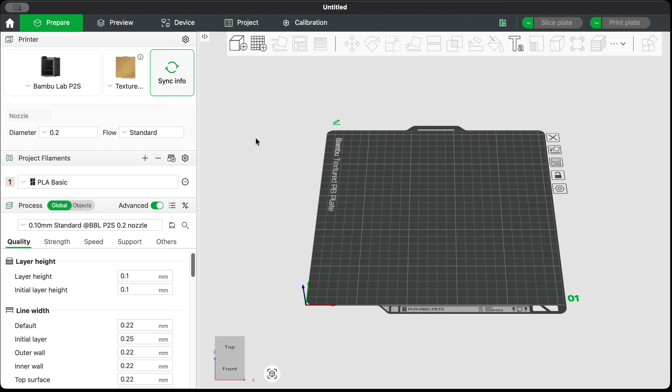It's actually much simpler than it might seem at first, so just follow along and you'll get the hang of it quickly. To start, open up Bambu Studio. Once you're in, import the model you want to work with and make sure it's ready to go. For this example, I'm using a small character model.

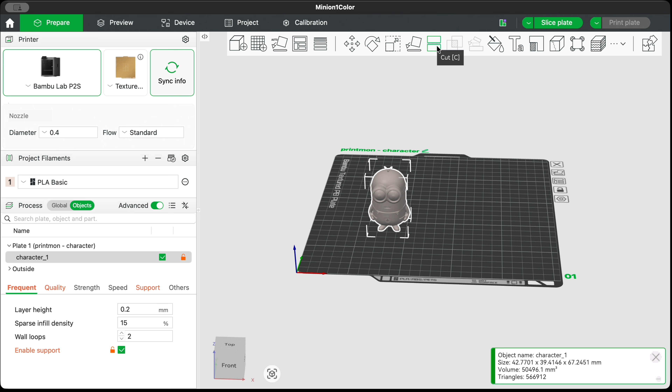Next, select your model so it's highlighted. After that, head up to the top menu and find the Cut tool. It looks like two blocks with a divided line between them. Click on that to begin.

At this point, you'll see a preview of where your software suggests making the cut. Don't worry if it's not where you want it. That's totally normal. You can adjust it easily.

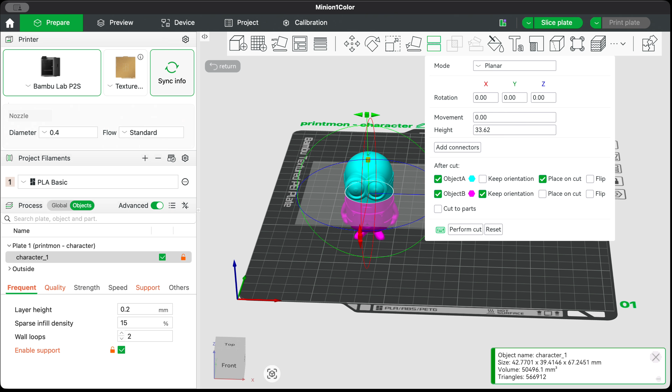Use the coloured axis handle to move the cut line around your model. Just click and drag along the axis to reposition it. For example, if your cut is going through an area you don't want, like part of the arm or face, you can slide it up or down until it's in a better spot.

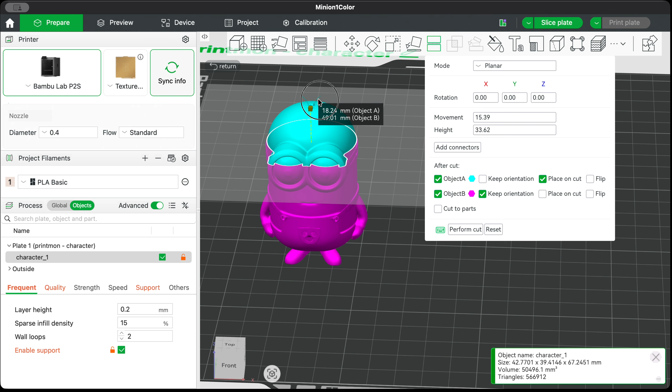You can also rotate or angle the cut if needed, giving you full control over how the model is divided. Once you're happy with the cut position, it's a good idea to add connectors so the pieces can be reassembled later.

Look for the option to add connectors, then choose a style. There are several options available like plugs, snaps or prism shapes.

Personally, I usually go with a prism style connector, often a square or even a hexagon shape. These tend to hold well and help prevent the parts from rotating when assembled, but the best choice really depends on your specific model.

Click on the model where you want the connectors to go, then adjust its size and depth. Larger connectors are generally stronger, but you'll want to balance that with how it fits inside your model.

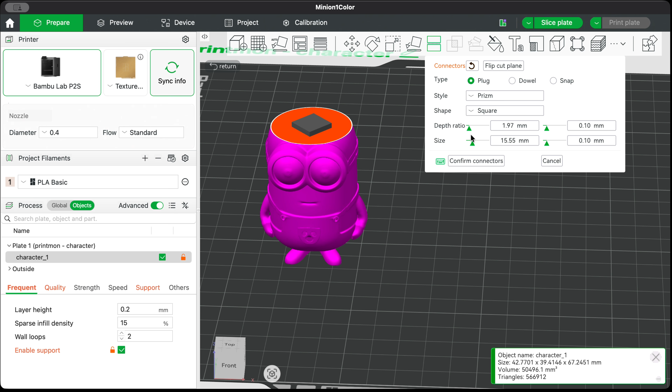Position it carefully. Placing it near the centre is often a good starting point. Once everything looks right, confirm the connectors. After that, go ahead and apply the cut.

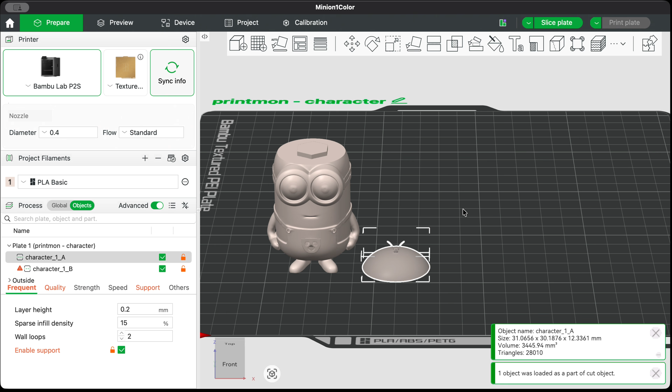The model will split into separate parts but still appear aligned in place. From here, if your goal is to print large objects in sections, you can move the pieces onto different build plates. Just add a new plate and drag that part over as needed.

Then slice your model and you're ready to print. If you preview the slice model, you'll be able to see exactly how the connectors line up between the parts.

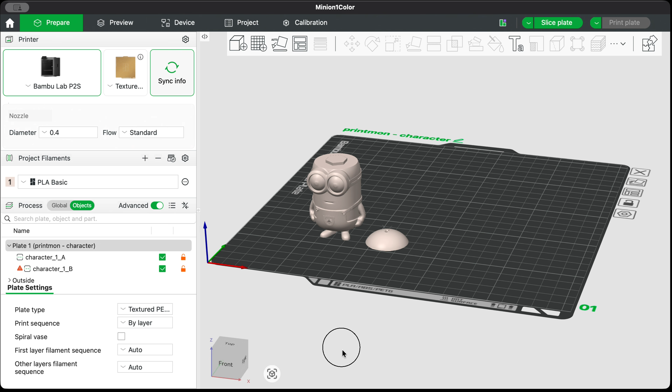And that's it. That's how you split a model into multiple pieces in Bambu Studio.